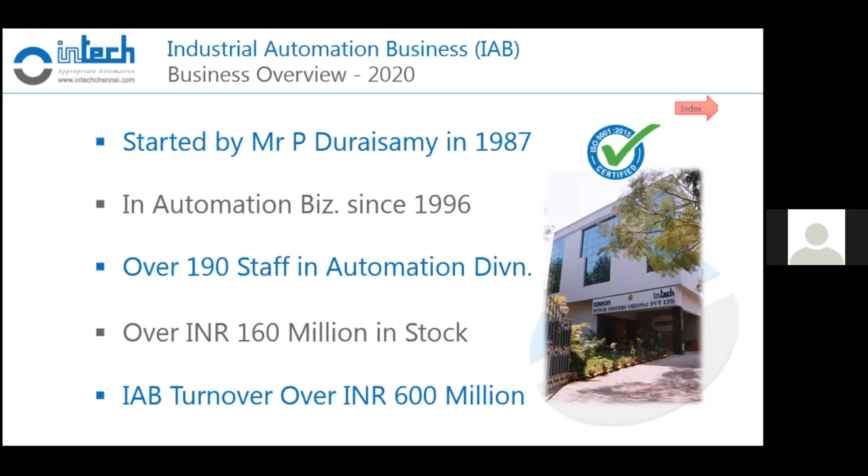Intech started as a company, now it's a group with various other activities. The group turnover is around 1.5 billion INR. The main business is industrial automation, and we have a panel and project division at Singaperumal Koil, about 40 kilometers from Chennai.

We also have a kraft paper mill of capacity 150 tons per day at Paramathi Velur. Then we have organic farming, wind energy, and a crumb rubber recycling unit. Then LED lighting under the brand Inno - it's a sister concern. We also have the largest Reliance petrol bunk in Tamil Nadu, located in Singaperumal Koil near Chennai.

Our business associates are mainly Omron, Delta, Autonics, and Mitsubishi. Apart from that, we have Oriental Motors, Honeywell, Nova Technic, IPA, and United Technomac Engineers.

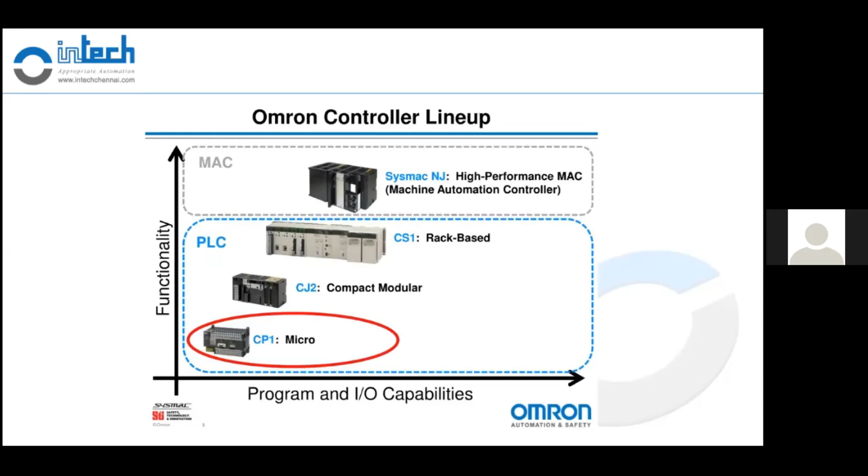First, I'm taking one example - the first example is machine tools.

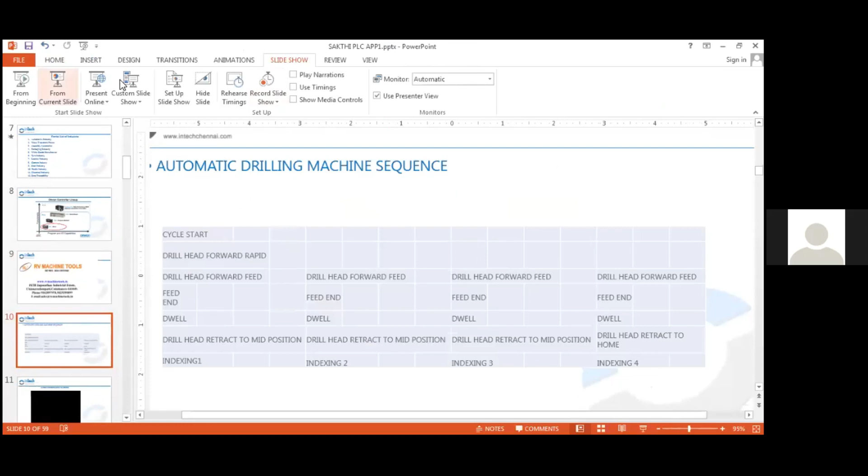This is one small sequence of operation - what we call the sequence of operation. We give a cycle start, then the drill head moves forward rapidly. Once it hits the forward limit switch, it will move and feed - feed is a very slow movement. While drilling, we cannot move the drill very rapidly, it will break the drill. At the end of the feed, there is a dwell - just to clear the burr, we dwell. Dwell is nothing but a small delay.

After that, the drill head retracts to mid position, and then there is indexing - rotation of the component, called indexing. Then we have the next cycle after indexing: drill head forward, feed, feed end dwell, drill head retract to mid position, index 2. Similarly, we have another cycle, third indexing, then final indexing - drill head forward, feed end, dwell, and this time the drill head has to move to home position.

Now, I'll just play the video once again for your understanding. If this sequence is clear - is it clear? Yes, sir. Yes. Okay.

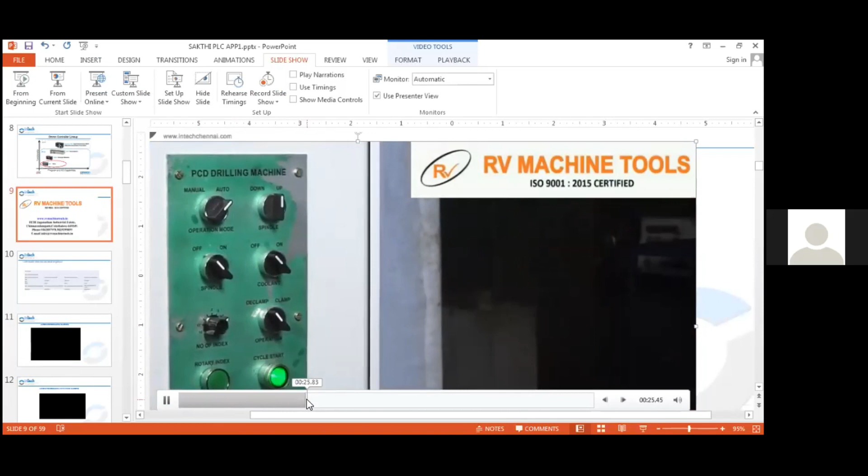This is cycle start. See here it is just stopping in the mid position. Okay, now if you see,

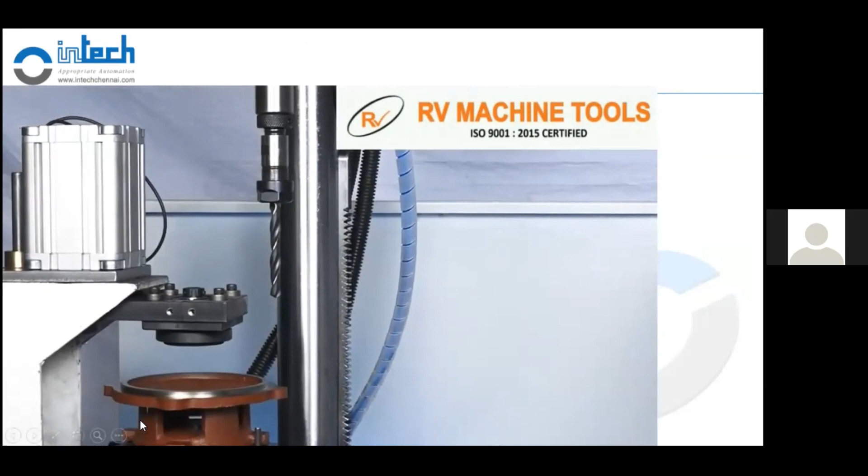Cycle start. Clamping, drilling. See, now you see that the drilling will go back to the mid position and it will not retract totally.

This is the fourth drilling operation. After that, it will go back. See, now you see the drill has gone back totally.

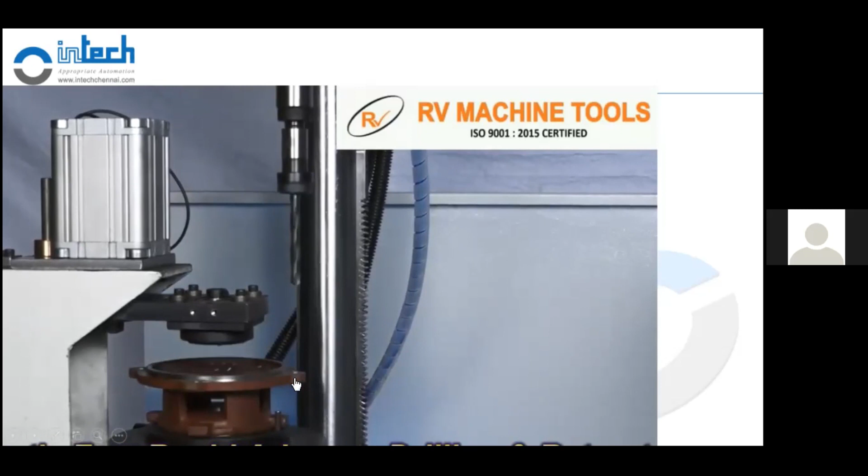That's all. See, so all these sequences we require PLC to program. PLC should know whether it has completed the first drill or the second drill or the third drill. So for these three drilling operations, similar retraction will be there. And after the fourth, it gets a signal that it is complete, so it goes back to the home position so that it will be easier to remove the component.

Okay. This is one more drilling machine, just for understanding, I've repeated it.

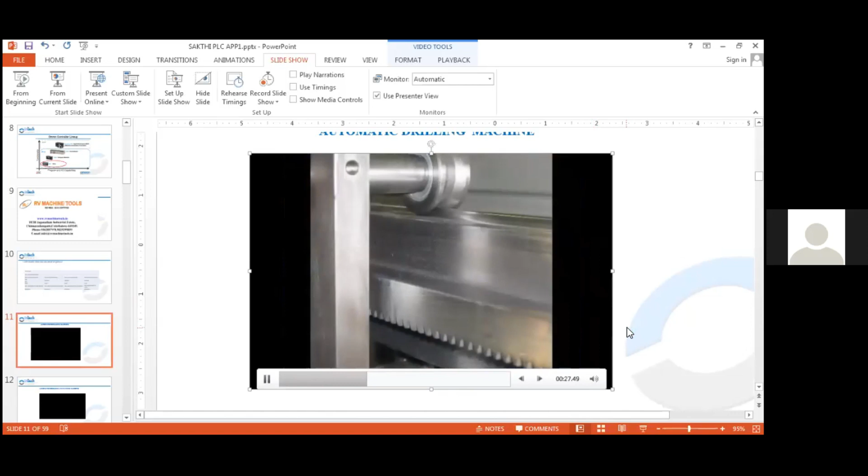There's a solid bar here. So it is drilling at a regular pitch.

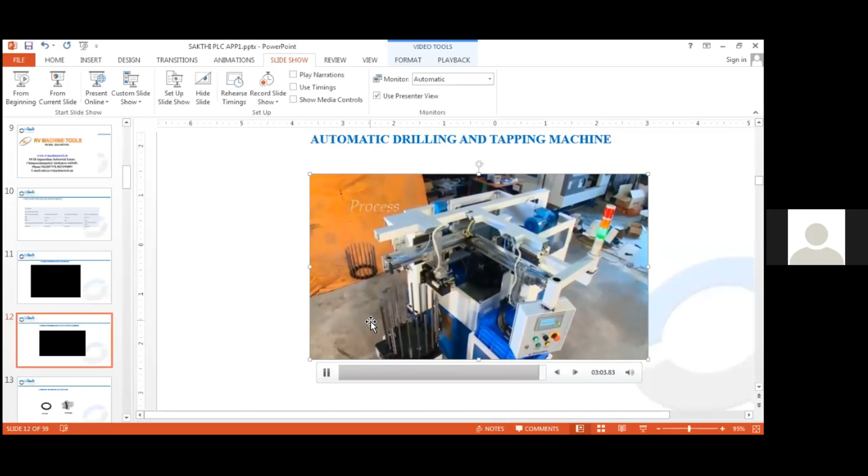Okay, these are mainly metal cutting operations where I've just given a few examples like drilling, tapping only. There are other things like milling, boring, and then we have burnishing and many operations. So all these machines operate on the same principles using small PLCs.

Then the next major area is assembly automation, automatic assembly. Here, for the sake of simplicity, I've taken this O-ring fitting on a small fitting, how to fix an O-ring on a fitting. So this is one small video. You'll understand how O-ring is being fitted here.

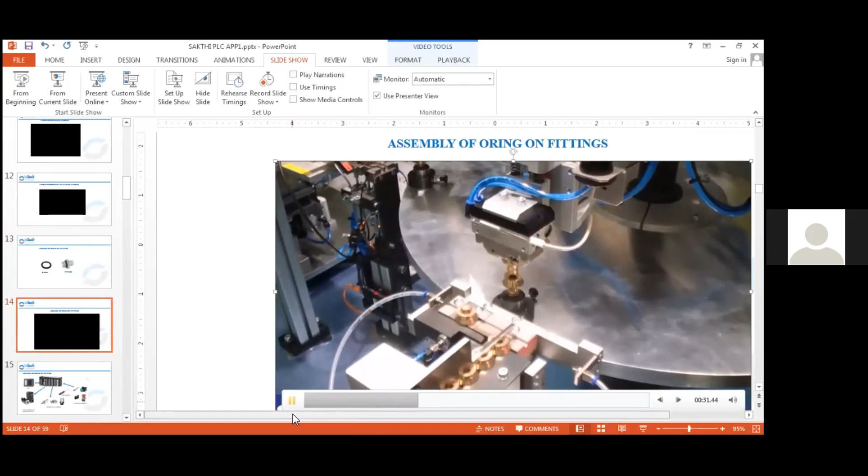These are all small pneumatic pick and place systems. The station places the component on the fixture. The O-ring is expanded and fitted onto it.

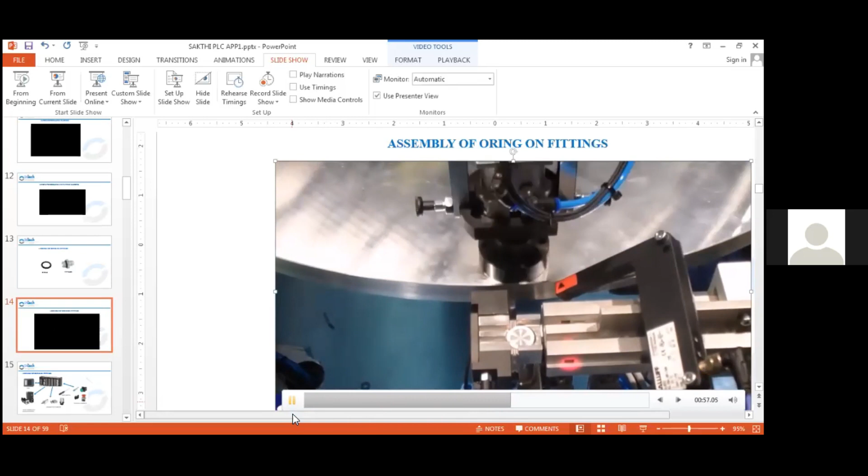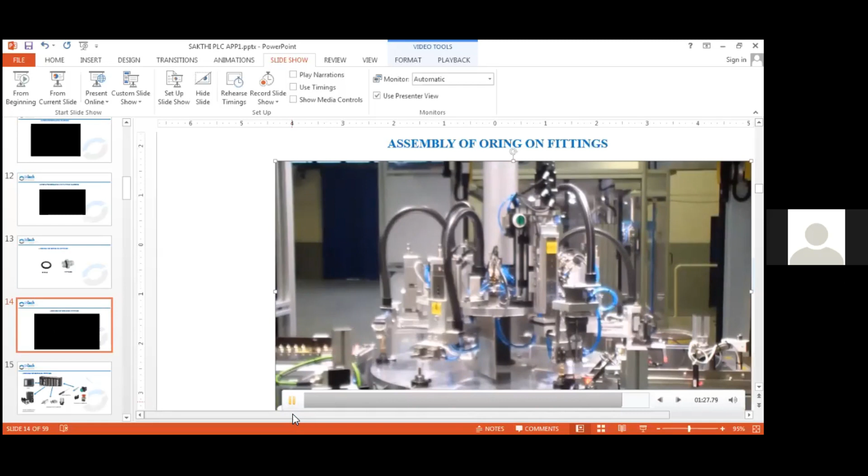This is the unloading portion. The component is taken away from the jig, unloaded. So this is one small operation I've shown you.

Similarly, there are many things like spring assembly, even the total car seat belt assemblies, which are very critical parts and very minute. They are all done using PLC only.

So we've seen metal cutting, we've seen assembly. Now we'll see the motor automation line.

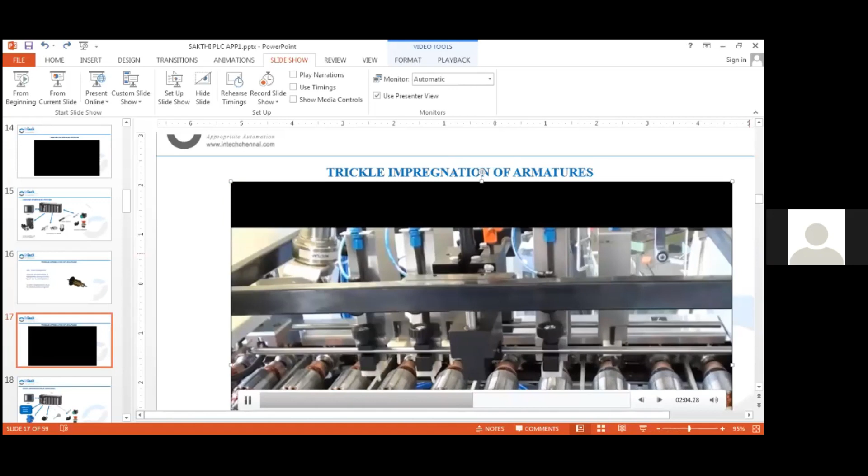This is pouring of a mixture of resin and hardener. It is being poured onto this as it revolves.

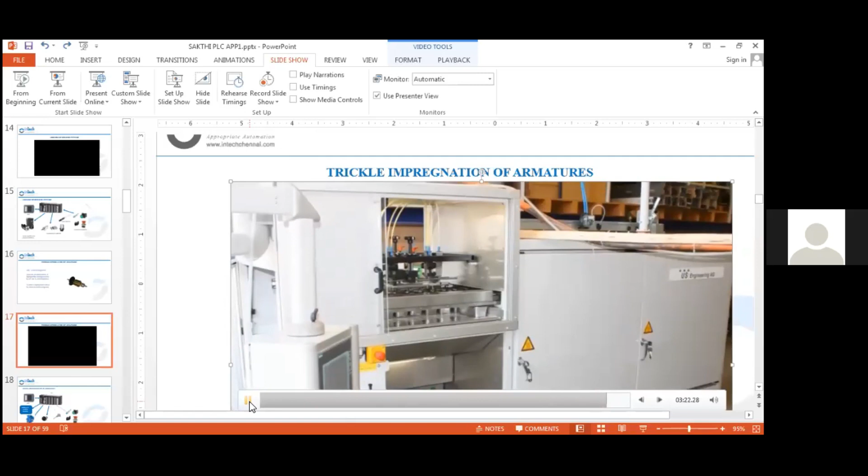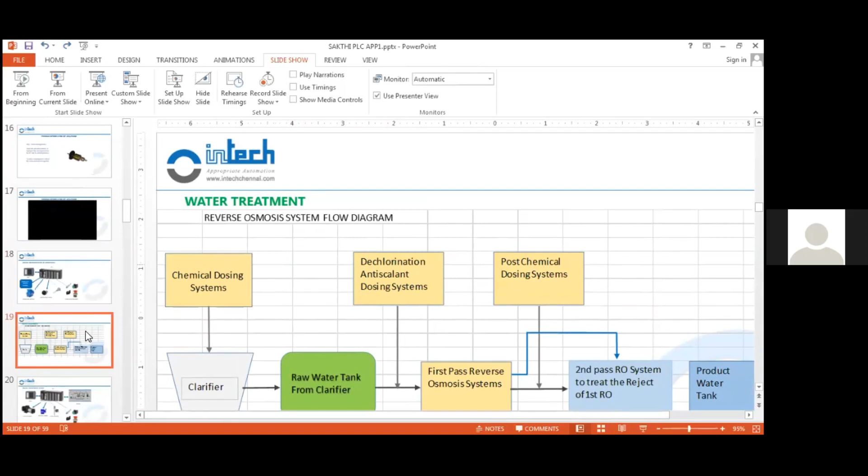So this is all about trickle impregnation. Now I'm moving on to another process, which is water treatment. There are different types of water treatment - basically reverse osmosis process, then we have STP, sewage treatment plants, and ETP, effluent treatment plants. I've just taken water treatment RO plant as an example.

First, water is filled in a clarifier where there is some chemical dosing. From there, the water is pumped onto the raw water tank. Then we have dechlorination, antiscalant and dosing systems. Then it goes through the first pass reverse osmosis, where there will be a membrane. Osmosis is a process wherein thinner liquid enters into a thicker medium through a semi-permeable membrane. Reverse osmosis, by applying slight pressure, we are reversing the process.

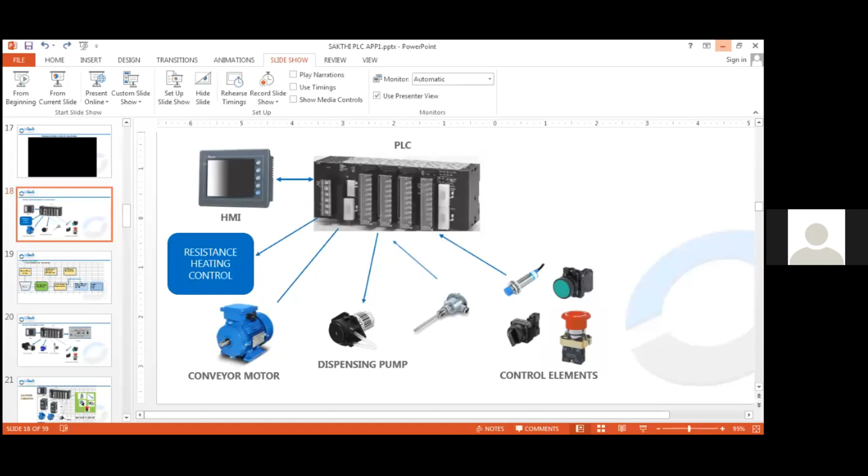Sir, understood? Is it clear? I think Cyril understood, hope you understood. Yes, he replied yes, understood, sir. Where is it? I'm not able to get the chat box. Yes sir, Cyril explained, he understood, sir. I'm not able to get the chat box. That's okay, no issue, no issue.

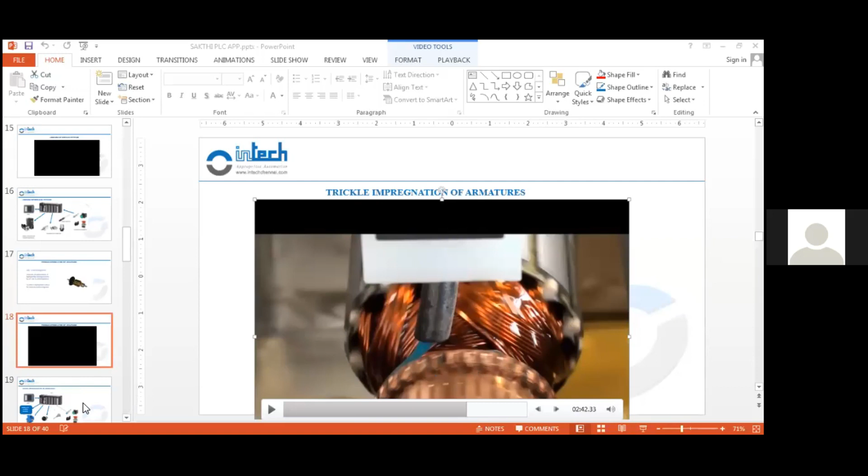Coming to the leather industry, there is one more big market for PLCs. Here mainly Siemens PLCs are used because a lot of leather making machines are designed and manufactured in Italy, in Europe. So this is called the leather shaving machine. You can just see the video, I'll explain to you later.

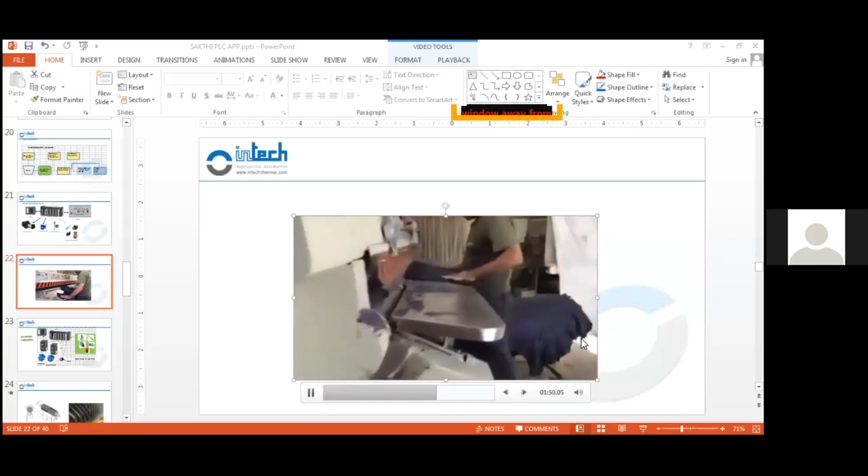Sir, in the chat box, one question: what kind of product is this? What is this used for? I'll just explain it to you, sir.

Okay, so this is basically a leather machine. This is called a leather shaving machine.

The processed hide or skin, rather not fully processed, will be having this hair. So this machine is mainly used to remove that hair and maintain a uniform thickness in the leather for further processing.

So this, how it is done is, the leather is passed between the rollers. There is one plain roller and one cutting knife, called the cutting knife. As it rotates, it removes the hair, and even if the skin is too thick, a bit of that thickness is also removed. This process is called the leather shaving machine.

So in this machine, according to their requirement, they can adjust it. Automated means it moves forward and reverse automatically, and there is a very precise adjustment of the thickness to which it has been shaved - that is the distance, the gap, between the two rollers.

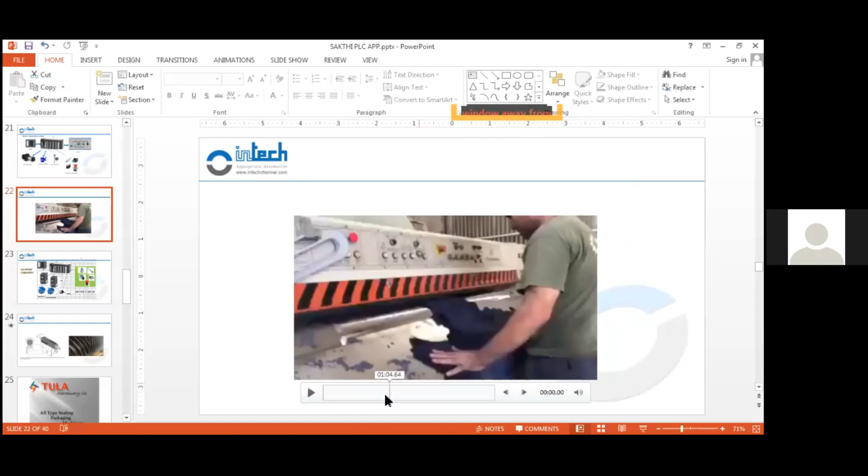I'll just play a very short portion of the video again. This is basically leather - pre-processed leather, not totally processed. They're sending it through the machine, so any hair is removed and even the thickness of the leather is kept uniform.

Sir, is that leather being stretched? No, not stretched, sir, it's actually only cleaning. So how it is done is, it has got blades here, and these blades revolve along - there's one plain roller, one blade. When the skin or leather is passed between this, it's inserted. Okay, sir, thank you.

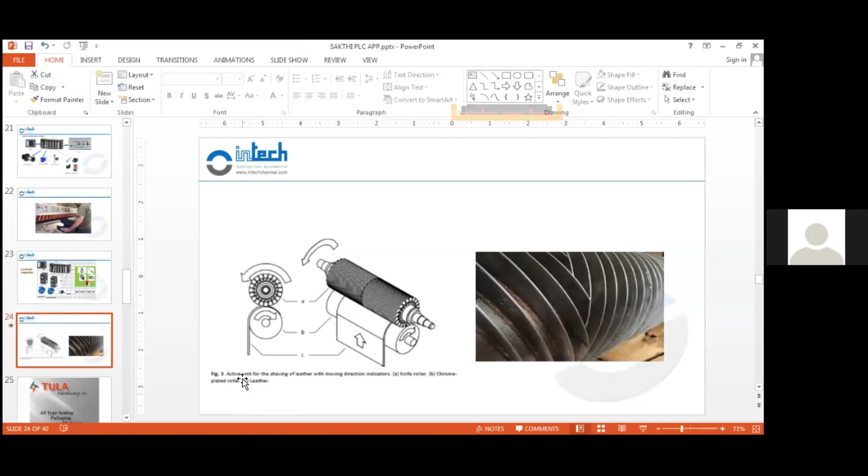Actually, I didn't play this slide first, that was the problem, so the title was not there - so there's a doubt here.

So another industry I'm moving on to is packaging machinery. There are a lot of packaging types - product packaging, food eatables packaging like raw materials, pepper, mustard - all these are being packed, even turmeric powder, and then chips like Lays, all are done in a packaging machinery. It's again an automated process.

This machine is called a form fill seal machine. Form means this will come as a single sheet, which will be formed into a tube. Then the material will be filled and then sealed - so it's called a form fill seal machine.

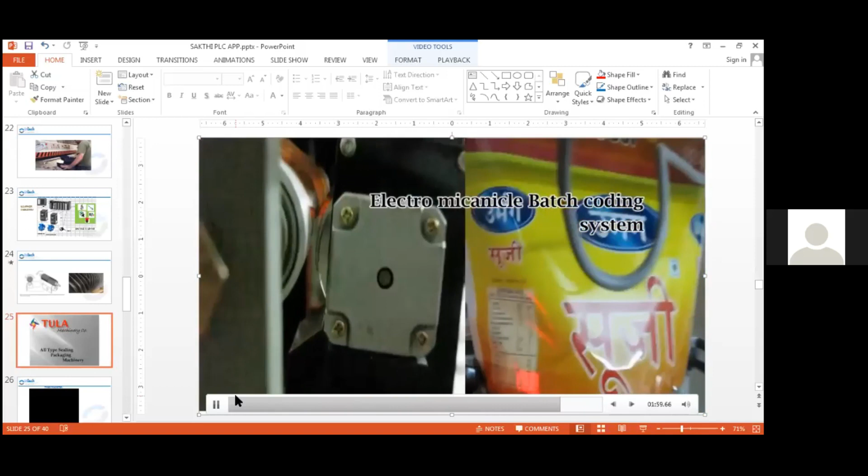So this is all about the packaging machine, but here what they've shown is very slow because the video to explain is just given slowly. But these machines are run at very high speeds. Any doubt in this?

No, sir. Okay, now we'll move on to a different industry, the process industry. I've just taken this tire as an example.

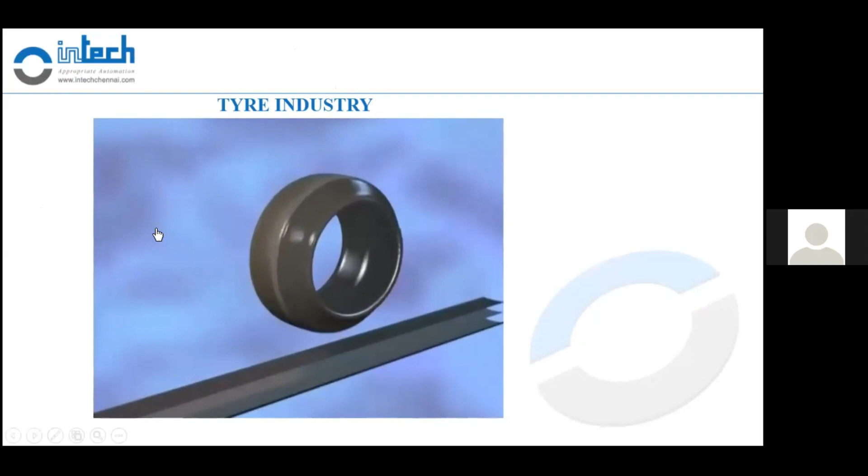A tire is round and it is black. However, if you examine all the manufacturing stages, you would realize what a complex product lies beneath this plain exterior.

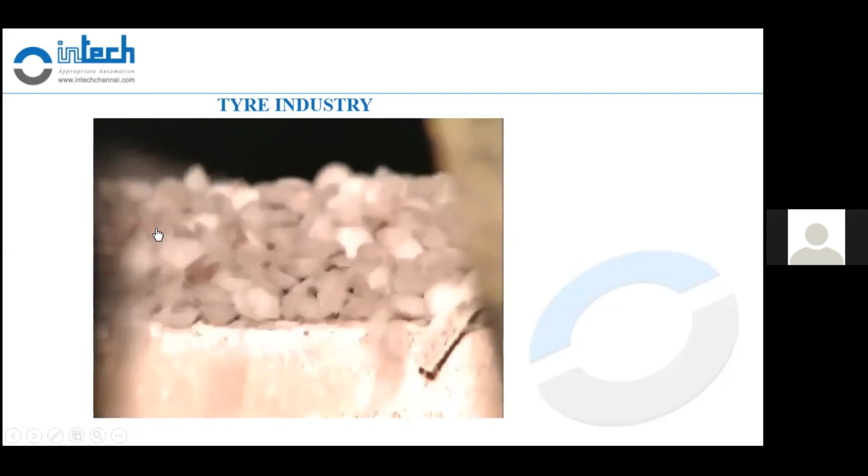In actual fact, leaving the natural and synthetic rubbers aside, more than 200 different materials are combined to manufacture the tire that we know so well. There is carbon black, silica, and sulfur, plasticizers, vulcanizing agents. There are also cords, a lot of cords, which can be either steel or fabric such as polyester and Kevlar.

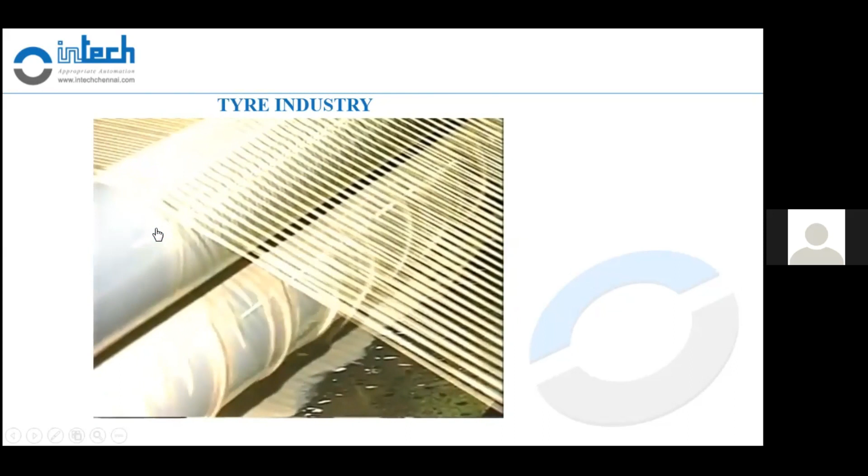These different raw materials are used to produce a wide variety of components - flat or profile products, steel cord or fabric plies, and also bead wire. These components give the tire its elastic properties, ensure its resistance to wear, provide adhesion, and determine its service life.

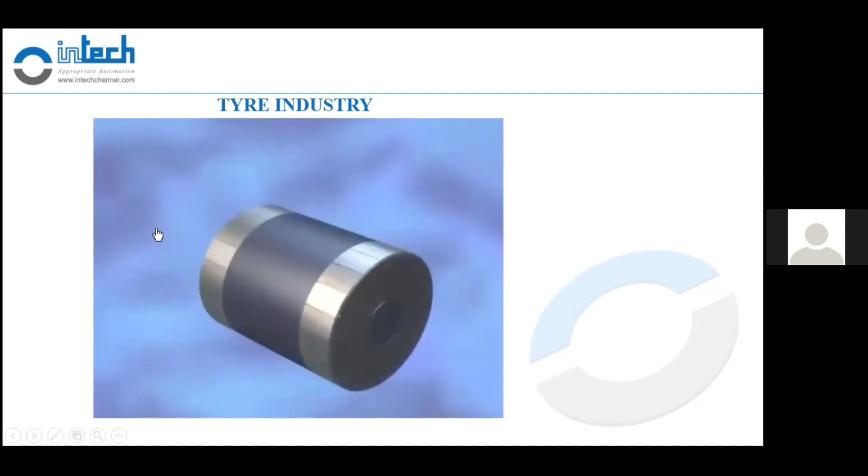It all begins in the tire building drum, which is a rotating cylinder with a flexible center so that its edges can be brought closer to each other. You'll see why in a minute. A thin, perfectly airtight sheet of synthetic rubber must first be laid down on the drum.

This will act as an inner tube inside the finished tire. The second layer is called the casing ply, because it contains the framework of parallel fabric cord, which we call the casing. This assembly is the vital substructure and consequently a key component in the radial tire.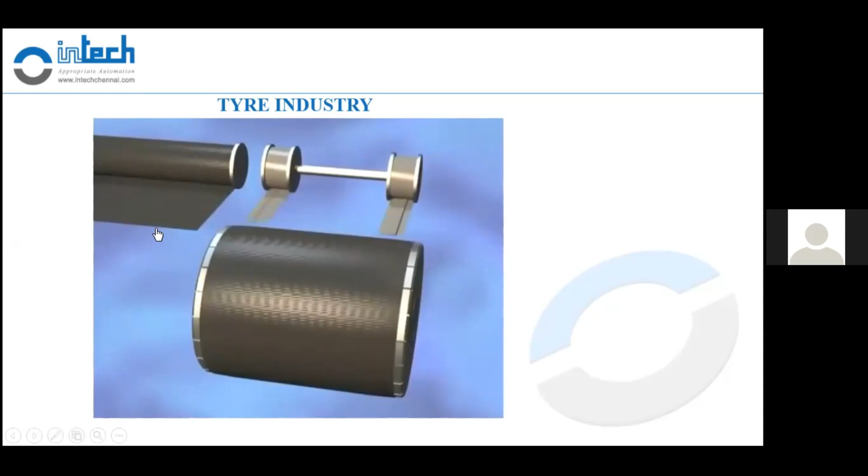Set tightly against strips of profiled rubber are two high-resistant steel wire hoops, known as the bead wires. They hold the tire firmly on its rim.

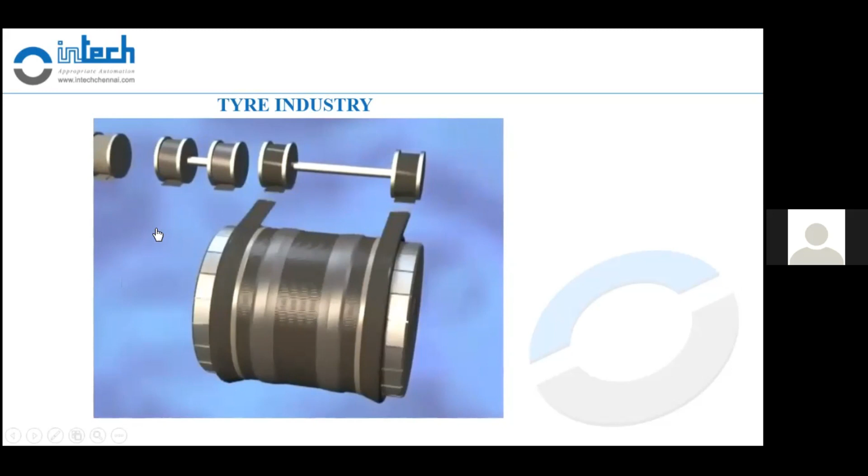The casing ply is then folded up over the bead wires to hold them securely in place. Other components are added with the same degree of accuracy. Some tires have dozens, but don't worry, I won't describe them all in detail. However, take a look at the sidewalls. They are made of rubber, both flexible and tough, to protect the tire from side impact.

Then, by inflating the central part of the drum, its edges are brought closer to each other. The tire is shaped.

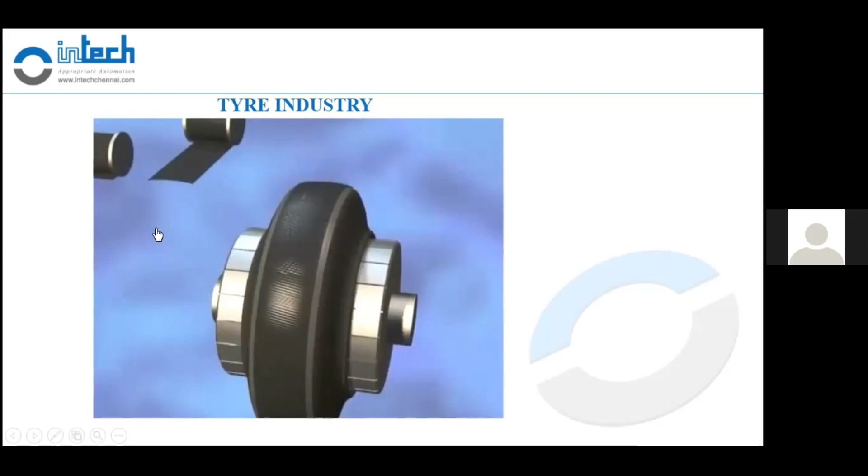The reinforcing tread plies, providing directional stability and mechanical resistance, have yet to be added. Fine but highly resistant steel cord strengthens these plies. Being laid crosswise to the casing ply, it forms shape-retaining triangles.

Now it's time to lay down the tread rubber. It is this part of the tire which will have a tread pattern and will be in contact with the road surface.

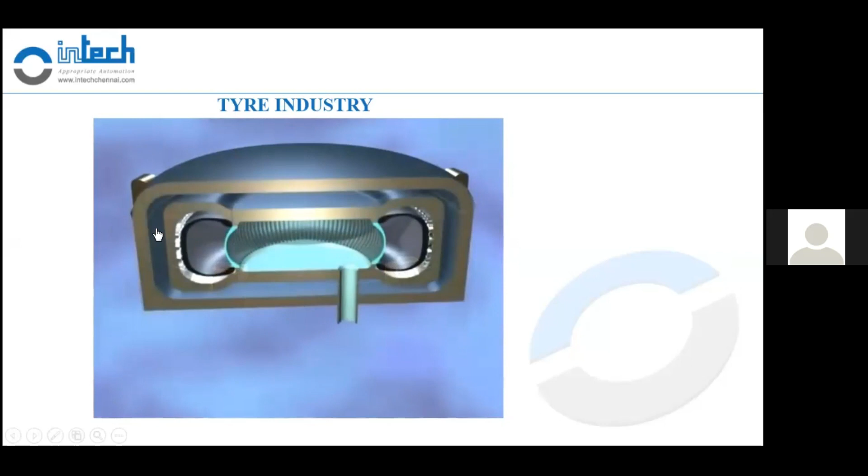The unfinished tire is then put into the curing mold, which has all the tire markings and the tread pattern. A curing bladder filled with hot pressurized water forces the rubber back into the mold cavities. The hot water and steam around the mold start the curing process.

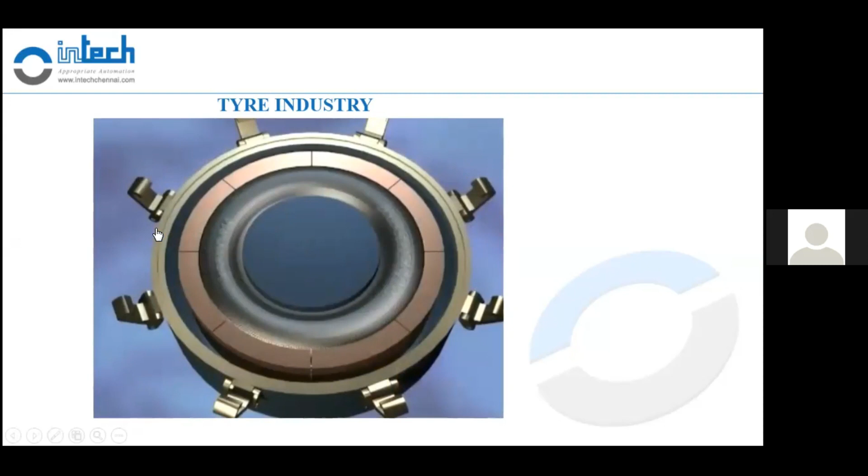This curing, or vulcanization, chemically bonds the rubber compounds to the steel and fabric cord reinforcement components. During this chemical reaction, the tire goes from a plastic to an elastic state. Sometime later, the transformation is complete and the tire emerges from its metal shell. The tire has been given its final features and finished to shape.

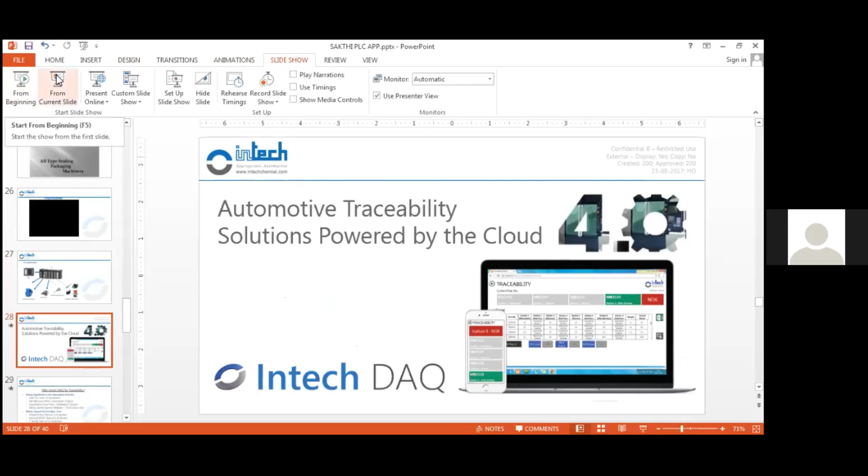The next portion I'm going to discuss is about traceability. Today, traceability is the word, like after Industry 4.0, IIoT, and all such words are being used here. So this traceability is the order of the day.

So I'll just briefly explain to you the traceability and have a small video about the facility we have in our office, HO. Any of you can come and see that facility whenever you are in Chennai. You can just fix up with us and come and visit our experience center. We have made a real-time model of traceability. Before going to that video, just to understand what traceability is, I'll go through this video.

We have something called a data acquisition software. So what traceability is, any product made in the industry undergoes a process.

So there are various processes, like it may be a machining process, a heat treatment process, or it may even be a quality inspection. So it has to pass through all this before it becomes a full-fledged product to go into the main products.

For example, a carburetor or a self-starter motor of a car goes into the main product called the car. So during the lifetime of the car, if there's any problem with the product, we generally get a replacement based on manufacturing defect. If there's a manufacturing defect, we get a replacement. If it's wear and tear, we may not get a replacement. But how do we evaluate whether it's a manufacturing defect or not? This is where traceability comes in.

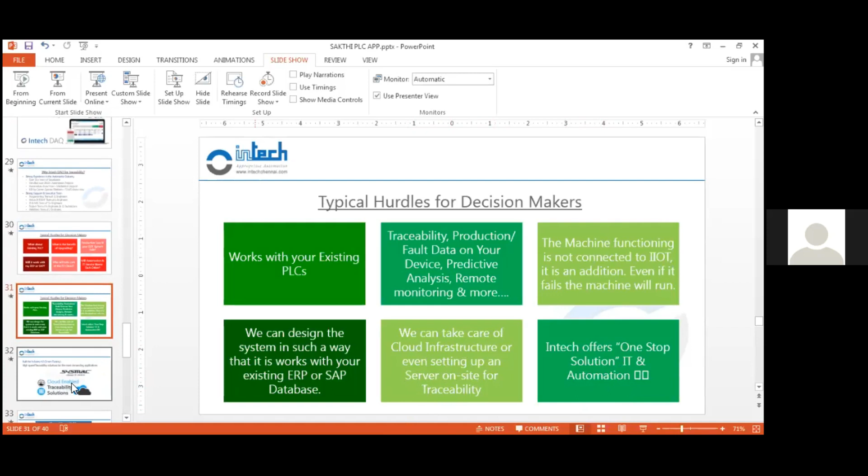So the most demanding solution, we have the Sysmac controller, which is a cloud-enabled traceability solution. Now all this will be covered in the video.

So whenever there's a defective product, it will bring a big loss to the company, and it will spoil their name. So I'll just play the video now, and after seeing the video, we'll discuss.

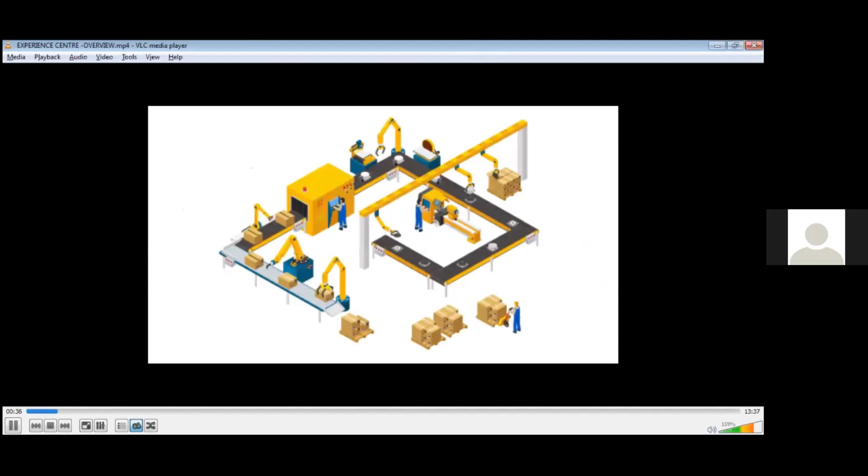So why do we need to have real-time data? Let's consider manufacturing industry for an example. There will be lots of production and assembly processes in their plants, and different types of small and large components will be involved to produce a single product.

So there are many possibilities for an operator to make a mistake during a process. For example, they can miss some component to assemble, or a defective or wrong component can also be assembled in a product. As a result, a defective component will reach their customer, which leads to customer dissatisfaction and business loss. And most importantly, brand image will be spoiled.

And it is not very easy to trace where the mistake happened and who is responsible. In this place, Industry 4.0 plays a vital role to avoid such situations.

It traces all the processes from raw material procurement to production, assembly, and dispatch to customers, and logs all this data in cloud for future reference. So we can have information like where and when the product was produced, who is the operator, who has approved the product, what components are assembled, what temperature was maintained, and so on.

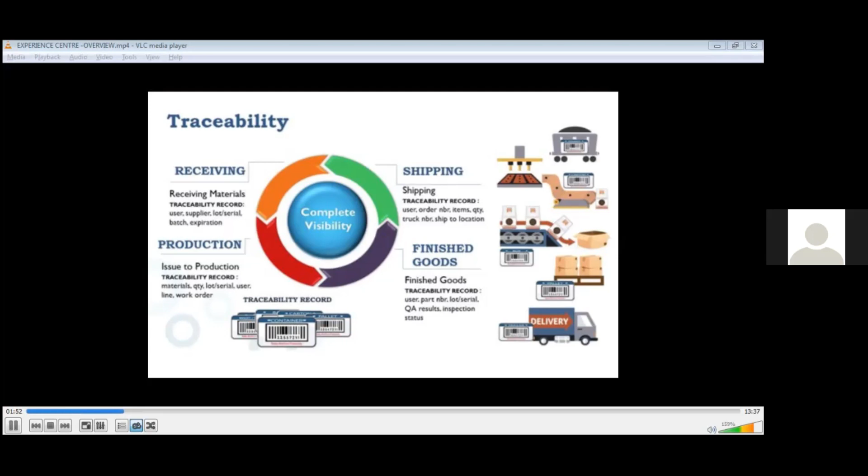So all this data will be logged in cloud and can be viewed in daily and monthly reports. Not only recording the data, we can also reject the defective product during the process itself, which prevents a defective product from reaching the customer. So now let us see how it can be done in industries.

This is our Experience Center. Here we have a demo setup for traceability solution, IO links with EtherCAT IO modules, safety solution, vision solution, motion control solution with VFDs and servos, and finally robot and cobot solutions. So let us see the overview of its functioning.

First, we will see about the traceability solution. Here we have set up 5 slave stations and 1 master station. In each station we are using different kinds of PLCs and HMIs, and they are all connected through a common communication medium, Ethernet, and connected with an Omron NJ controller.

So in the first station, we have Mitsubishi PLC and HMI. In this station, a Honeywell barcode printer is connected with the Mitsubishi PLC. It is a thermal barcode printer and has RS-232 communication to connect with the PLC.

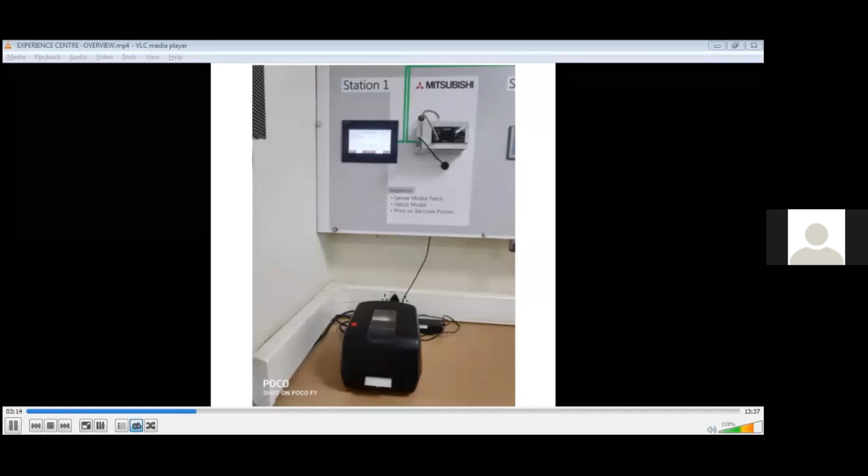In this station, the operator has to select the model of the product to be manufactured. Here we have 10 models, and these models will be fetched from the server. So when I select the particular model, the corresponding QR code will be printed using this Honeywell printer. The QR code will contain information of date, time, and model number. We can also customize this data as per our requirement.

In the second station, we are using Siemens PLC and HMI along with an Omron barcode reader. So in this station, we will start with scanning the QR code which was printed in the first station. If the previous station data is okay, then only we will proceed with the next process. Otherwise, we will reject the product and send it back for rework.

The same process will be followed in station 3 also. In this station, we have Delta PLC and HMI along with an Omron barcode reader, and an Epson thermal printer connected with the Delta HMI. This is one of the main advantages of Delta HMI, to which we can directly connect the printer, so there is no need to do any additional programming for the printer in the PLC.

In the fourth station, we are using Omron PLC and HMI. In this station, we have a basic type Omron vision camera. The vision system is mainly used for visual quality inspection.

Using vision camera, we can check the presence of small components, color and shape of the product, and we can do measurement and code reading applications. Here we are reading OCR and QR code and transferring the data to PLC. The PLC will transfer the data to Omron NJ controller and check with the server. When the previous station data is okay, then only we proceed with the next process.

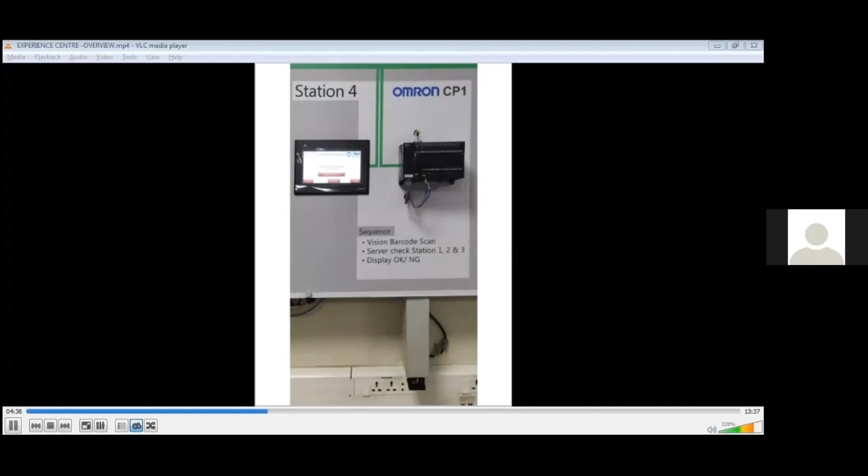The fifth station is the weighing station. Here we have a load cell and weighing meter connected with AB PLC. In this station, we have an MTV, which is a machine TV interface, used to connect a monitor with PLCs, and this will convert the program logic into machine language. So we can use a large size display as an HMI, and its programming is also similar to HMI programming.

We are considering this as a final station, and all the processes are completed, and we are taking the weight of the product, and we have set a target value as 2000. When the weight of the product matches the target value, then it will be qualified and dispatched to customer.

This is our master station. Here we are using an Omron NJ controller, and it is connected with a PC in which we have installed SQL server. The Omron NJ controller is capable of connecting with the DB using any interface, so it can communicate with SQL server, MySQL, or Oracle, etc.

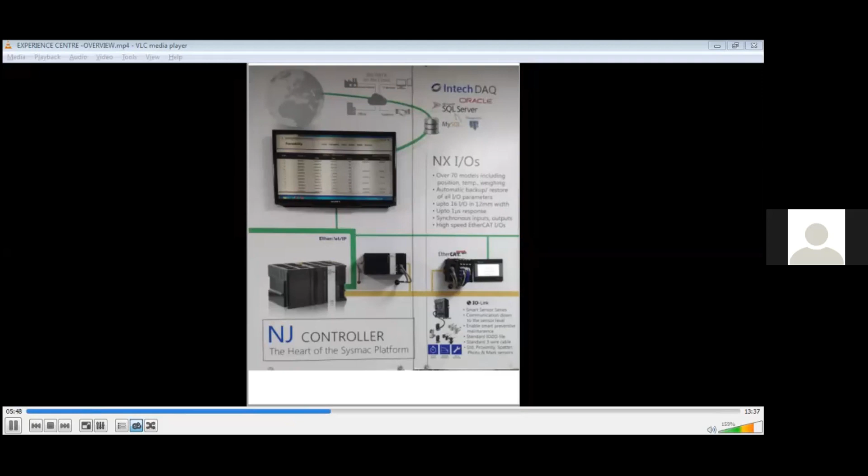This PLC will collect all data from every slave station and transfer them to the cloud. And in every station, it will compare the current station data with previous station data and give the result accordingly.

Finally, all the station data will be logged in the cloud, where we can get daily and monthly reports, and we can also get reports in Excel format and send mail to a concerned person. So this is how traceability works.

Now we will move on to remote I/O stations. So what is remote I/O? The I/O module is nothing but input and output modules to which we will connect the sensors and the actuators. The term remote I/O refers to the I/O modules installed in a distant place from the main PLC, because in industries it is not possible to have field devices near the main control PLC.

So with these remote I/O modules, signals can be received from faraway sensors and control signals can be sent long distance to control valves, motors and other driving actuators. Here we are using an Omron EtherCAT coupler which is connected with I/O modules and communicates with Omron NJ PLC through EtherCAT communication, and this will eliminate the complexity of wiring and ensure faster communication.

In our experience center, we have connected I/O-Link sensors with these I/O modules. The I/O-Link sensors are intelligent type sensors and will give process data as well as sensor information like output signal quality, sensor temperature and sensor running time, whereas normal sensors only give on or off signal.

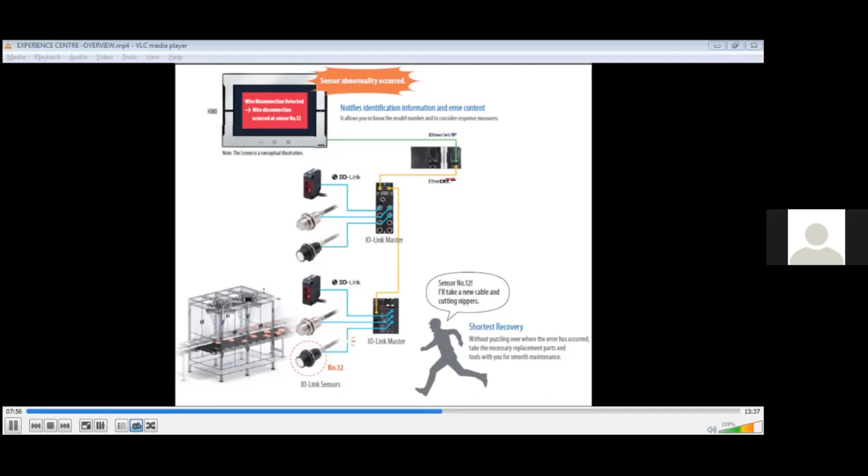The sensors have standard 3-wire type connection like non-I/O-Link sensors, so they can be connected with standard I/O modules also. But while connecting with an I/O-Link master device, it will act as an I/O-Link sensor. In our experience center, we have connected I/O-Link photoelectric sensor, proximity sensor and displacement sensor and display their values in HMI through communication. Next, we will see about safety solutions.

So what is the need for safety devices? As we know, machines and robots will also be working in industries and they will be dangerous to human beings, so they should be isolated from them or in off condition when a human enters their workspace. For that purpose, we need safety devices. There are lots of safety devices available in the market like safety light curtain, safety scanner, safety door lock switch, safety mat, etc.

The majorly used safety devices in industries are safety scanner and light curtain, so we will see about the functionalities of the light curtain and safety scanner in this video. Before that, we will see about safety over EtherCAT function, which is being implemented in our experience center using Omron safety controller, to which we have connected Omron safety light curtain and safety scanner.

Safety over EtherCAT is mainly introduced to use a single communication medium for both control and safety data. Instead of connecting safety devices with the control PLC, we connect them with the Omron safety controller, which supports safety over EtherCAT protocol. The safety data is transferred to the control PLC through EtherCAT for other processes, and the safety interlock logic is developed in the safety controller itself, so that we can get a faster response.

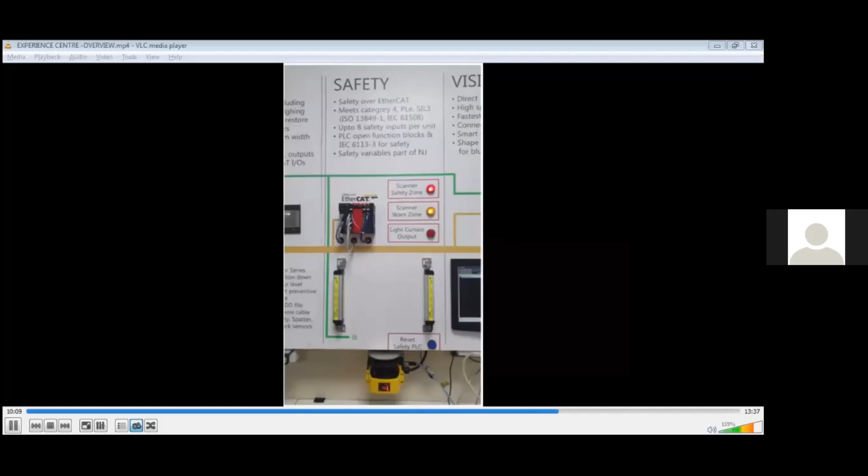The light curtain basically acts as electronic fences in industries. It has one transmitter and receiver. The transmitter transmits parallel infrared light beams to the receiver unit. When an object interrupts one or more beams, the control logic of the light curtain stops the machine immediately and avoids the accident.

The next one is the safety scanner, usually an area scanner, which uses laser beams to monitor the working area of machines and robots. When an object or human being interrupts this working area, it gets reflected beams and stops the machine immediately. It covers a 270 degree area up to 50 meters, and you can also customize the safety zone using the programming software.

Next, we will see about the advanced vision system. This is a high-speed, high-accuracy vision controller to which we can connect up to 8 cameras. As I already said, vision is mainly used for visual inspection, and with this controller we can do conveyor tracking and defect identification applications, which cannot be done with a basic vision camera.

We can share real-time images to the server with a customized folder name, and it has high-speed communication protocols like EtherCAT, Ethernet, and Profinet to communicate with PLCs and robots.

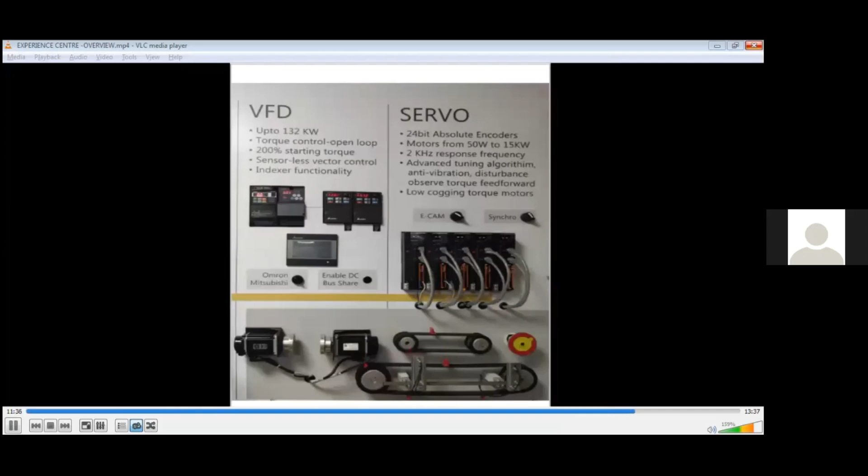The next is the VFD and servo station. Here we have Mitsubishi, Omron, and Delta VFDs. The two Delta VFDs are used for an energy saving concept using the DC bus sharing method, where the DC buses of both VFDs are connected in parallel.

During regeneration, the motor acts as a generator, produces energy and sends it back to the VFD. This causes a rise in DC bus voltage, and in the DC bus sharing method, this excess voltage is shared to another VFD which drives a motor, using the power drawn from the mains.

We are using 5 axes of Omron servo drives with EtherCAT communication protocol. Of these, 2 servo axes are used for synchronous function and 3 servo axes are used for ECAM function. The synchronous function is used to drive the 2 axes of servo motor at the same speed and in the same direction.

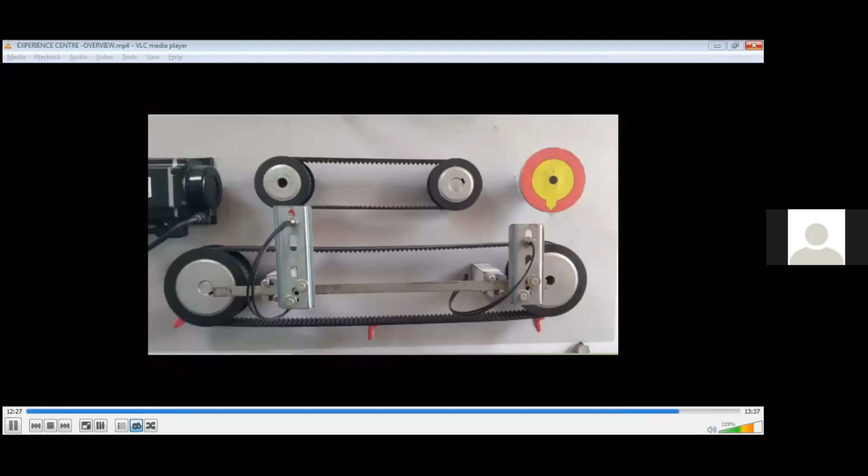The other 3 servos are used for the flying shear or cutting concept, where the knife and the product are moved in synchronous speed to achieve precise cutting and reduced cycle time. This is achieved by the ECAM function of the Omron servo drive.

Next, we will see about robot and cobot solutions. Here we have the Mitsubishi SCARA robot and Omron articulated cobot. The SCARA robot has 600 mm reach and 6 kg payload, and it can be used for high-speed pick-and-place operations and repeated processes like soldering and screwing, where production rate is the main constraint.

We have the Omron cobot with 1300 mm reach and 12 kg payload. The cobot is a collaborative robot, mainly designed to work along with people without causing any damage, as it stops operating when hit by an external object or a human being. There is no need to use additional safety devices.

In the Omron cobot, we have an inbuilt vision camera, using which we can check the orientation and shape of the product, and code reading is also possible with this camera.